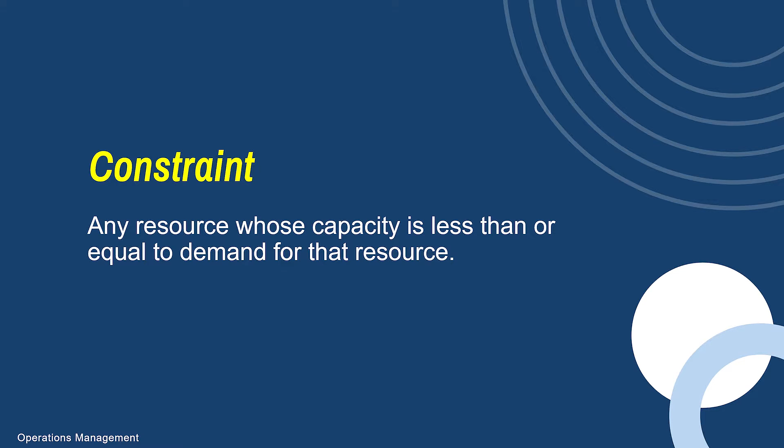So in this video, I'll talk about constraints, bottlenecks, and using the theory of constraints to overcome bottlenecks. So first, what is a constraint? A constraint is simply any resource whose capacity is less than or equal to the demand for that resource.

So we experienced that with the pandemic. When the pandemic initially started, the demand for masks went sky high to where companies could not produce them fast enough to meet demand. Therefore, there was a constraint on the system, specifically a market or demand constraint. So when demand is too high to where companies cannot produce the item fast enough, they have a constraint, and that's considered a demand constraint.

Another type of constraint is supply. So the opposite end of the supply chain holds true as well. So if, again, sticking with this pandemic example, if we didn't have enough supply, in certain instances we didn't. I think it was cars, the computer chips for new cars. There was a shortage of those. So supply was low, and because supply was low, car manufacturers could not produce new cars fast enough to meet demand, and used car values began to go up because used cars became a hot commodity. So supply as well as demand can be constraints on a system.

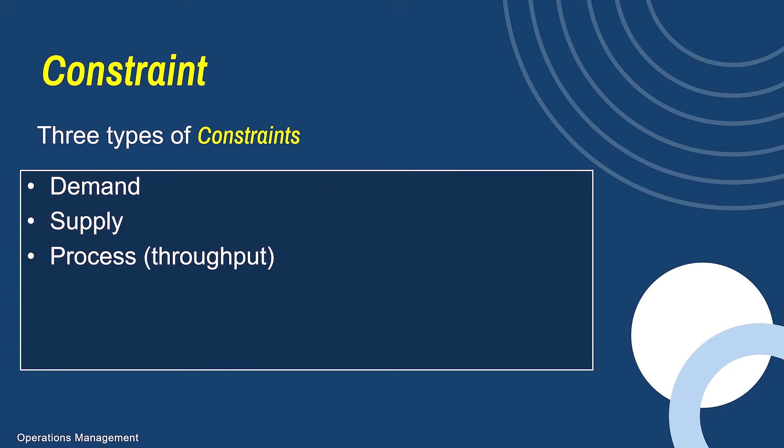And the last constraint I like to talk about is a process constraint, or what we call throughput. So throughput is the maximum output achievable, specific to production in this case. So if, over an 8-hour workday, a company can produce 100 units, then their throughput would be 100 units over that 8-hour workday. And a process constraint would be anything that prevents that company from producing those 100 units.

And that leads me into the next point of bottlenecks. So a bottleneck is just the biggest or most limiting constraint on a system. And there are several types of bottlenecks that I'm going to discuss, but specifically I'm going to talk about a process bottleneck relative to the theory of constraints. So in the rest of this video, I want you to think about a process constraint. And I'll use bottleneck and constraint interchangeably, but basically I'm referring to the most limiting constraint on a system, because that's what a bottleneck is.

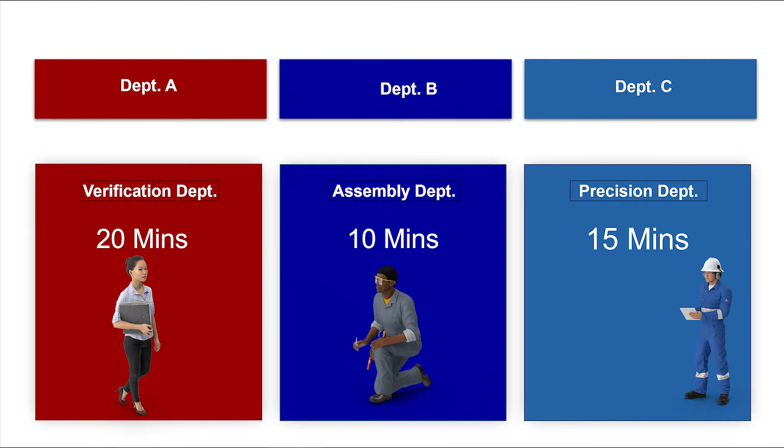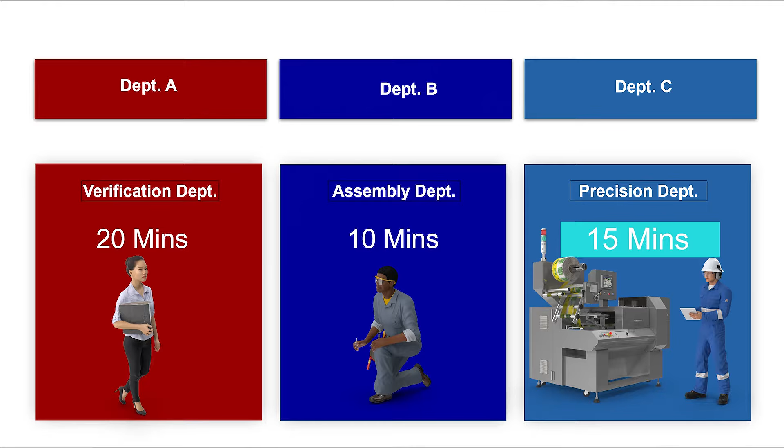So a bottleneck in a supply chain occurs at the point in the process that requires either the longest time or has the slowest rate of production. So for example, if you have a product that has to go through 3 departments to be completed, Department A takes 20 minutes, Department B takes 10, and Department C takes 50. Because Department C takes 50 minutes, that is where your bottleneck lies. Now let's say Department C gets a new machine, and now they can reduce that time from 50 to 15 minutes, and your bottleneck will then shift to Department A, because now Department A has the longest time in the process at 20 minutes.

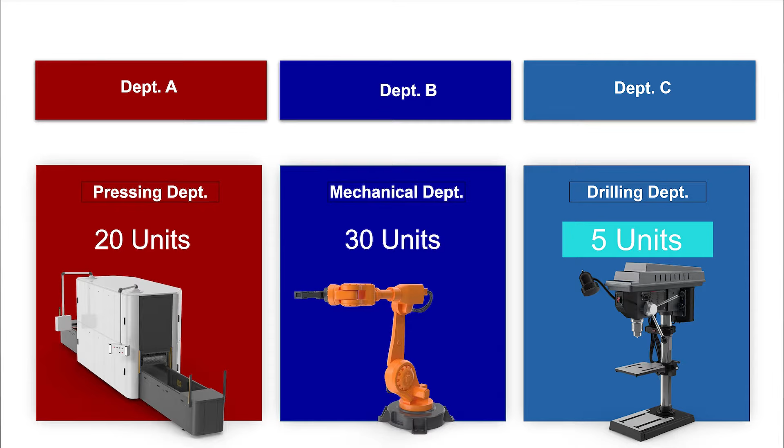Now we can look at this same example from a unit perspective. Let's say Department A produced 20 units, Department B 30 units, and Department C 5 units. Because Department C is producing the least amount of units, there lies your bottleneck. So it's either the longest time or the slowest rate of production. So one thing you can do when it comes to bottlenecks is ask, first, what takes the longest? Anytime there's a time stamp involved in the process, that's the first thing you want to ask yourself. What department or task in the process takes the longest, because there lies your bottleneck.

Now, there are instances where there are no timestamps involved, and you have to determine where your bottleneck is, or identify a specific type of bottleneck. And that is where the different types of bottlenecks come into play. So first we have a regulatory bottleneck. These are more government-driven bottlenecks. For example, import-export control. If laws change related to importing and exporting product, and that is something that your company does often, then that could create a bottleneck for your business. So regulatory bottlenecks can definitely cause problems for organizations.

The next bottleneck is a technology bottleneck. Almost every company today uses some type of software system to help with order fulfillment and things of that nature. If that software crashes, they have a problem on their hands because they may not be able to print what they need for shipping products to customers, or they may lose access to information. That can create a bottleneck and delays and cause customer issues if things aren't delivered on time, right? And that doesn't have to be specific to software. It can be any type of technology that impacts the business in a negative way.

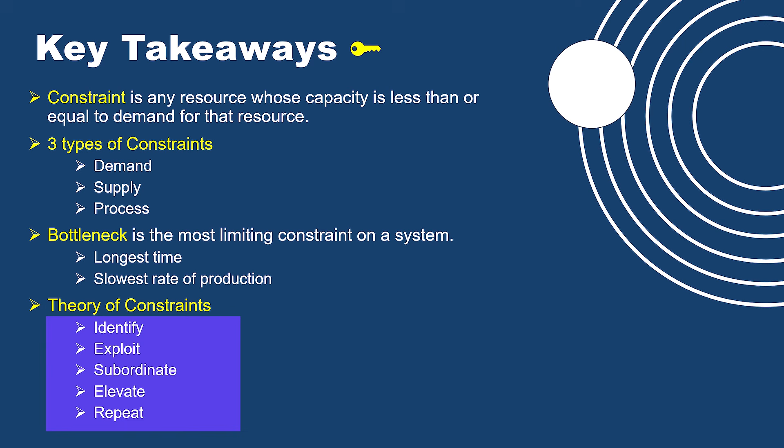However, within the supply chain, a bottleneck is either the longest time in a process or the department that has the slowest rate of production. And when it comes to the theory of constraints, remember, you have to identify, exploit, subordinate, elevate, and then do not allow inertia to cause a system's constraint.